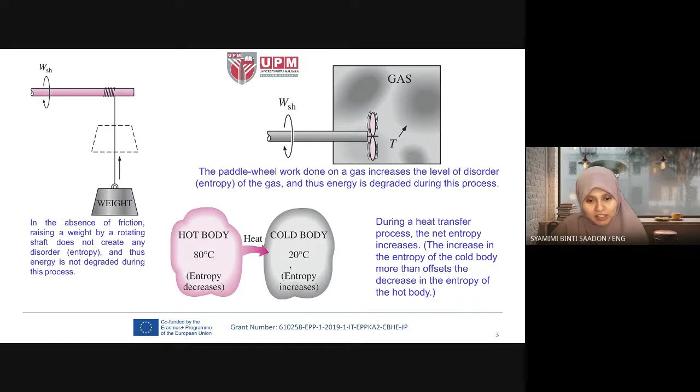During a heat transfer process, the net entropy increases. The increase in entropy of the cold body more than offsets the decrease in entropy of the hot body. During a heat transfer process from hot to cold material, there will be some entropy loss during the process. For example, even though the hot body is at 80 degrees Celsius and the cold body is at 20 degrees Celsius, not all of the thermal energy within the hot body will be transferred to the cold body. Not all of that 80 degrees will be totally transferred so the cold body becomes 100 degrees. There will be some energy loss during the heat transfer process, so only a portion of the energy from the hot body will be transferred to the cold body, not all of it.

This is a more interesting part. So how do we calculate, how do we measure this irreversibility, this entropy?

We have this TdS relation, where T is temperature and dS is the differential of S, entropy. We use it like enthalpy, the first law, using the per unit mass basis, so we write it in small letter, not capital letter. We can use capital letter S, meaning it is in kilojoule per Kelvin, but if you write small s, it means it is in kilojoule per kilogram per Kelvin.

So we use this TdS relation, and that's why we always draw the T-S diagram, temperature versus entropy S, because it results from this TdS relation. Of course, when we integrate this dS, we have S, so we get this equation.

For a closed system, the TdS relations are valid for both reversible and irreversible processes, and for both closed and open systems. This is a closed system example, a piston, and this is an example of an open system, a control volume. We have this control volume for example of a nozzle or turbine. The process system is open, but we still determine the control volume, CV. So this is an open system, for example a turbine process, where mass can flow in and out.

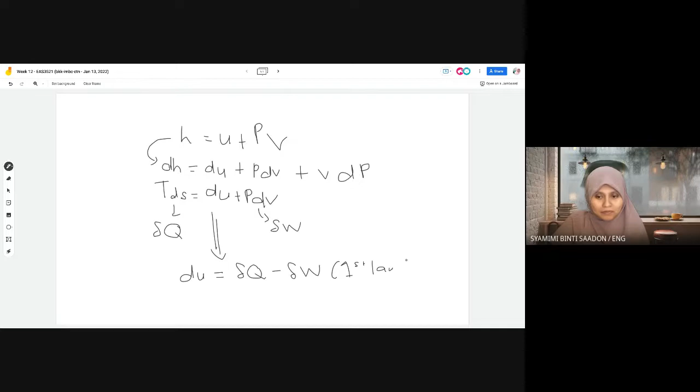This is also from the first law definition previously. So from this definition, we have this. So this is the first relation of TdS. Now we are going to create the second relation of TdS. So from both of these equations, we see that this part and this part are the same.

So we can write that TdS - these are the same - so TdS is dH minus VdP. This is the second relation of entropy TdS. So we have the first and second: first one, TdS equals dU plus PdV. Second one, TdS equals dH minus VdP.

So that's how, back to these slides, we get these two relations - these two relations of entropy that we're going to use. So from these two relations, if we rearrange and divide by T, temperature, we can also write it in this form.

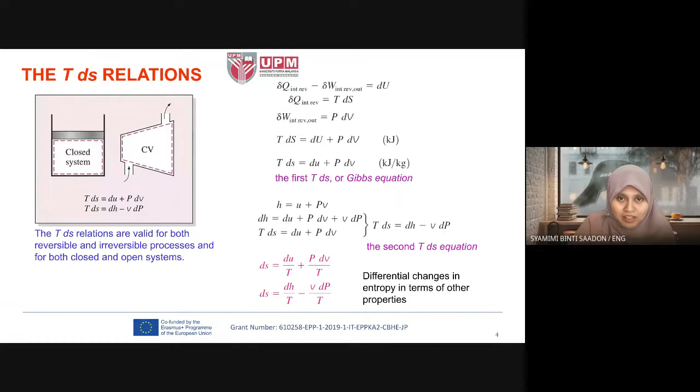This one is entropy change of liquids and solids. We want to apply this entropy relation for liquid and solid, and later on for gas. Maybe for us in aerospace, we use a lot more entropy for gas, but I'll explain liquid and solid first, since aero deals with air.

This one for liquid and solid can be approximated as an incompressible substance. So liquid and solid we assume approximate them as incompressible, meaning they cannot be compressed.

The opposite, gas, is compressible. That's why in aerodynamics 1, you only learn incompressible flow. But in aerodynamics 2, you see compressible flow, more high speed gas flow.

So entropy applies to liquid and solid. Since we assume liquid and solid are incompressible, meaning they cannot really be compressed, or it's hard and difficult to compress them.

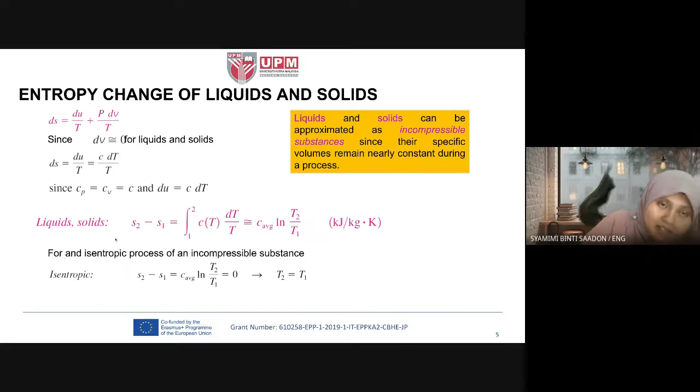So for an isentropic process of an incompressible substance, isentropic means no change in entropy, so S2 equals S1, meaning S2 minus S1 is zero.

For an isentropic process, like isothermal (constant temperature), isobaric (constant pressure), isochoric (constant volume) — isentropic means constant entropy, so S2 equals S1, and this relation becomes zero.

So what we can deduce from the isentropic process of an incompressible substance, liquid and solid, is that temperature also stays the same: T2 equals T1 for an isentropic process of an incompressible substance. This is what we derive from the relation, and it's important for you.

Entropy change of ideal gas. First we assume the ideal gas. From the TDS relation just now, we have ds equals du over T plus P dv over T.

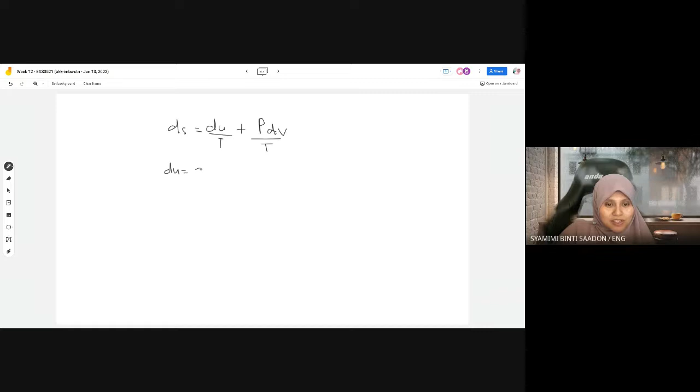I explain. We have the TDS relation: du over T plus PdV over T, the first relation. So we know that du is equals to Cv specific heat dt. This one we use specific heat at constant volume because we want to apply it for dv volume, because we have volume here. So du, we replace with Cv dt.

So that we can integrate this later on. This PT part, from the ideal gas relation, since this is ideal gas, PV equals to RT, ideal gas, chapter 2 or chapter 3, cannot remember, chapter 3. PV equals to RT, ideal gas. So here we have this PT relation with PT, P over T means R over V, from ideal gas.

So we replace this part, so we have V. Later on it's easy for us to integrate because we want to integrate the equation later on. So Cv, now we have relation in terms of T, so we can integrate this part and also this one R dV over V. If we leave it here like this, also correct, but it's just that we cannot integrate, we cannot develop it more. So in order to integrate and develop it, we change it into this form from the ideal gas equation.

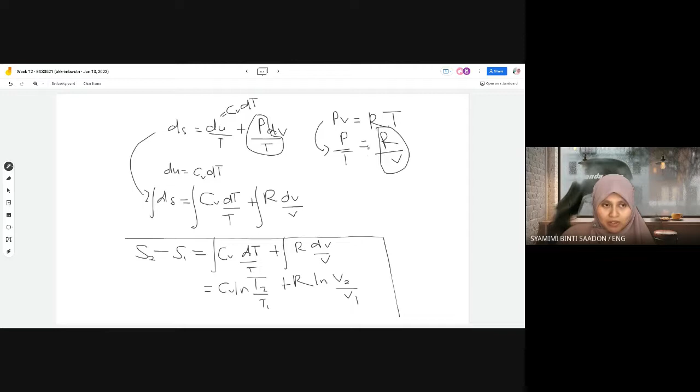So that's how we get this relation for ideal gas. Remember, ideal gas only, because we are using this part, so this is only valid for ideal gas.

So we have this part relation, and we can also use the second TDS relation, which relates enthalpy minus VdP just now. So this enthalpy we can write as CpdT, the definition of enthalpy, also CpdT. So from the ideal gas relation, we write V, ideal gas relation, this VT part can be replaced with R over P, from the ideal gas relation, R over P. So replace here R over P and replace here CpdT.

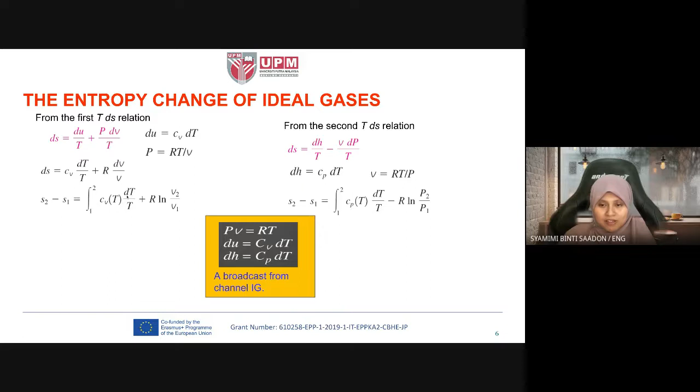So the same as this part, we write in integral form. So we have R ln P2 over P1, and this is R ln V2 over V1. So we can use both of these relations, depending on the parameter information that we have. If we have information on pressure, so we use this relation; if we have information on the volume, so we use this relation. So both are valid.

Okay, isentropic process of ideal gas, constant specific heat approximate analysis. We're not finished yet. We can continue developing this equation to get another equation.

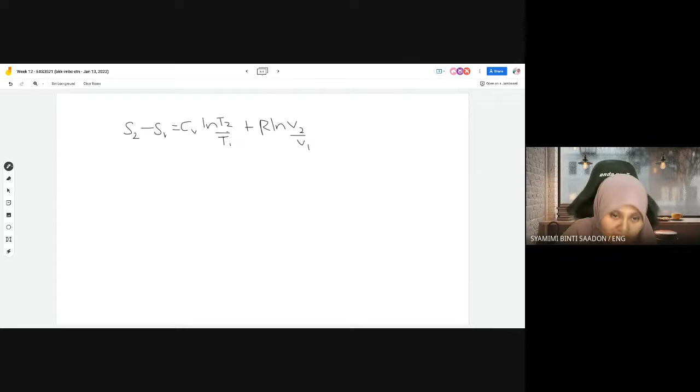Let me show it to you. So S2, from the first relation we have, S2 minus S1 equals CV ln(T2/T1) plus R ln of the first relation we got just now, which is this one, right? So if it's an isentropic process, this equals 0, S2 equals S1, since isentropic means entropy is constant. So we have CV ln(T2/T1) equals minus R ln(V2/V1). This is only for isentropic process.

And then we can rearrange this: ln(T2/T1) equals... we can write it this way... ln(V2/V1). So R over CV here is a power, right? Because we have ln, by logarithm theorem, we can change it into power form, the R/CV power. And we can also write it to eliminate the negative part, changing the ratio to V1/V2, so we eliminate the negative, with R over CV as the power.

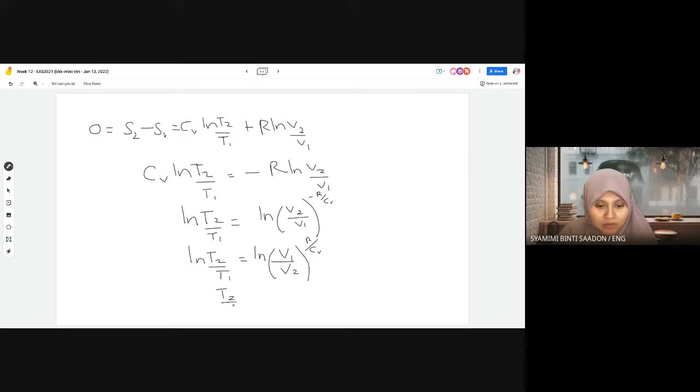So ln becomes T2/T1, and V1 over V2. R over CV is what we call — we have this relation.

There's a lot of relations, but you don't have to memorize them all. Just know that R can also be written as CP minus CV, the gas constant R, and CP over CV is the specific heat ratio gamma, so gamma equals CP over CV. If you replace this relation here, R over CV becomes gamma minus 1. We replace R over CV using this definition, so we get gamma minus 1.

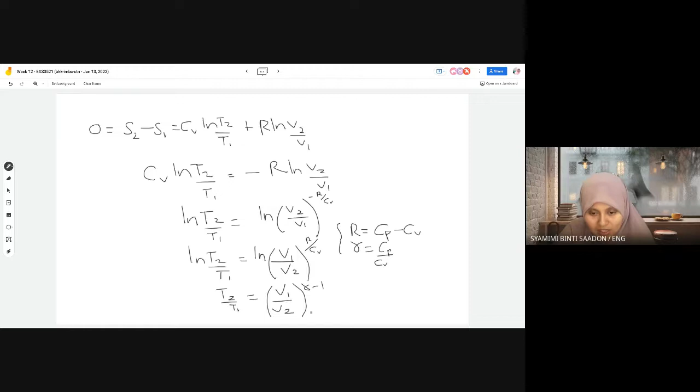Why can't we just state it as R/CV? Because gamma minus 1 is easier to calculate. Gamma is just a number — normally for air it's 1.4, or sometimes 1.2. So it's easier for us to calculate rather than using R/CV directly. So we get this relation: T2/T1 equals (V1/V2) to the power of gamma minus 1. That's how we get from here to here.

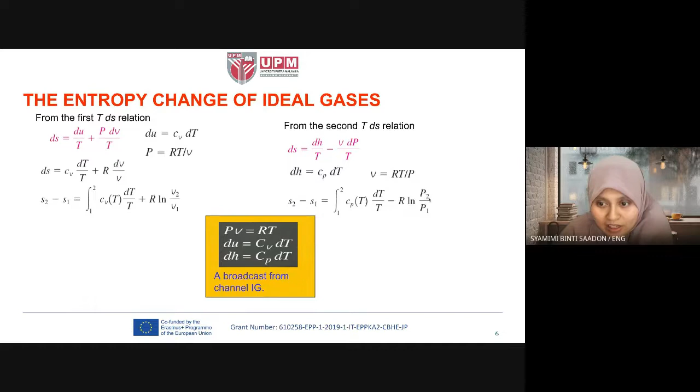Even though you've seen the steps, this is just to explain how we derive this part. So we have this one, same as before, using the second TDS relation, which contains pressure P. Using the same method, we get this second relation. This is very important — these three relations are very important. For ideal gas, using the ideal gas relation, we replace T with volume too. So these three relations are very, very important. We are going to use them several times until propulsion courses.

This is valid only for isentropic process, ideal gas. Please remember this — only isentropic process, ideal gas. Why? Because we assumed this term is zero; otherwise we couldn't derive until this step. So only for isentropic process can we use this relation, because we assumed this part is zero. And it's for ideal gas because we used the relation PV=RT to develop the equation, so it's only valid for ideal gas. So again, remember these three forms, very important — you're going to use them several times until propulsion courses and in your future. It's only valid for ideal gas, isentropic process, and constant specific heat — we assume it's constant, doesn't depend on temperature, etc.

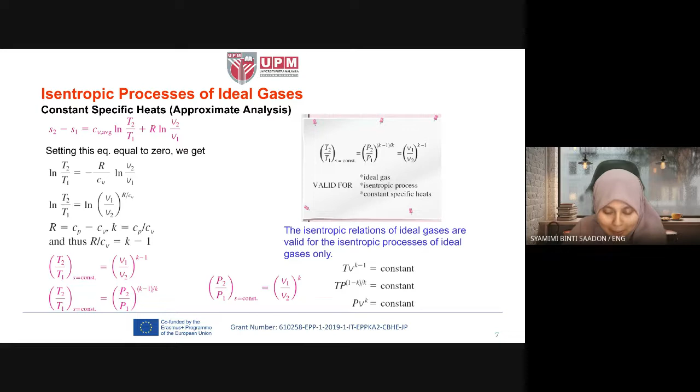This goes back to the first law of thermodynamics. Now we mix the first law and second law. Remember the first law: delta Q minus delta W equals dH plus kinetic energy and potential energy. The Q term is TdS, which we already derived just now. So we can rearrange this first law equation as TdS equals dH minus VdP — this is the second TdS relation.

Okay, so from both of these, we have delta Q equals dH minus VdP. This part is the same, so delta Q equals dH minus VdP. And if we replace this part here, dH and delta Q, so we have minus VdP here. That's how we get it, let me show you.

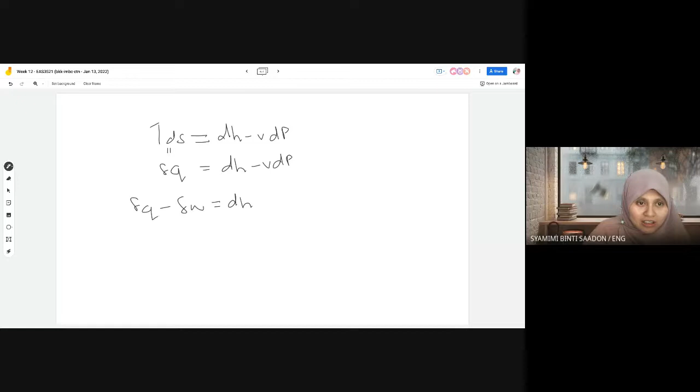And then from the first law relation, we have delta Q minus delta W equals dH plus the change in kinetic energy and the change in potential energy, right? So this dH, delta Q minus dH is minus VdP.

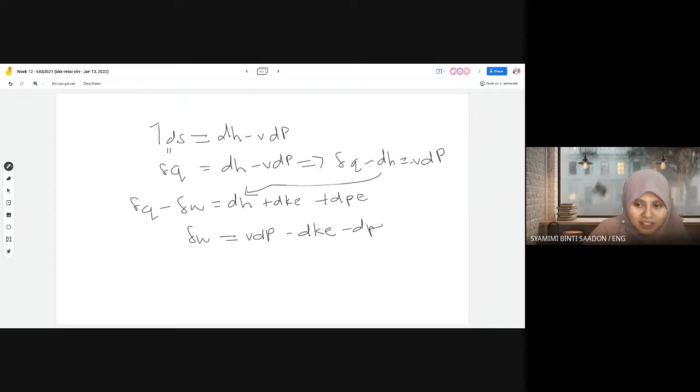So from here we can put in VdP. So that's why we get delta W equals VdP minus the change in kinetic energy minus the change in potential energy. We change the negative to positive. So that's how we get this one.

Okay, for reversible steady flow work, this applies in steady flow systems, for example compressor, turbine, nozzle. So we have this reversible steady flow relation. If we integrate it, we assume there is no kinetic energy and no potential energy, or very small potential energy, so when kinetic and potential energies are negligible, we have only this reversible work, VdP.

Otherwise the full equation is like this for reversible steady flow work, to calculate reversible steady flow work. For the steady flow of a liquid through a device that involves no work interaction, such as a pipe section, the work term is zero. If it's for liquid steady flow through a liquid device, for example a pipe.

For a pipe there is no work done. A pipe has only the flow, fluid flow, so no work, no work interaction. So this part is zero, no work.

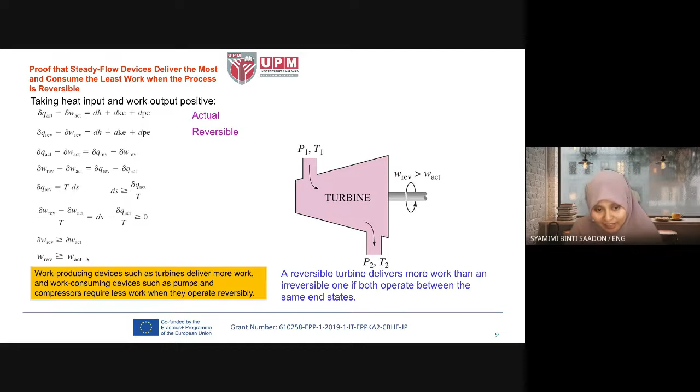Example of application: turbine. You can see this application of reversible work in a turbine. Rearrange the equation, etc. So you have this proof that a steady flow device delivers the most and consumes the least work when the process is reversible — of course, reversible is an ideal process. So if you have a reversible process, it will deliver most work, meaning more power output, and consume the least work. This is just to show from the equation that the reversible process work is higher than the actual work produced in reality, for example, for a turbine.

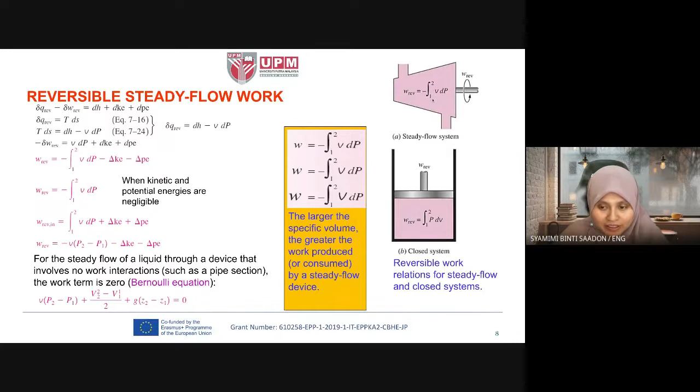This example is a general equation which can be applied for turbine. Okay, for compressor it's the same, it's just that here we don't have the negative value anymore because the compressor's function is opposite of the turbine.

So for example, for turbine the pressure at the exit is less than the pressure at the inlet, because in the turbine we expand and decrease the pressure. In the compressor it's the opposite, we compress, so we increase pressure. That's why the change is negative versus positive.

Okay, just that about the increasing or decreasing pressure value. So if the potential and kinetic energy are negligible, we have this form of reversible work for compressor.

For this we have isentropic, polytropic, and isothermal. I think we only focus on isentropic, which is more frequently used, and isothermal. Polytropic we seldom use, so you can just forget it.

Okay, isentropic. For the isentropic process we have this PV^k relation, k or gamma, the specific heat ratio. So the reversible work can be written in this form: gamma RT over gamma minus 1, times P2 over P1.

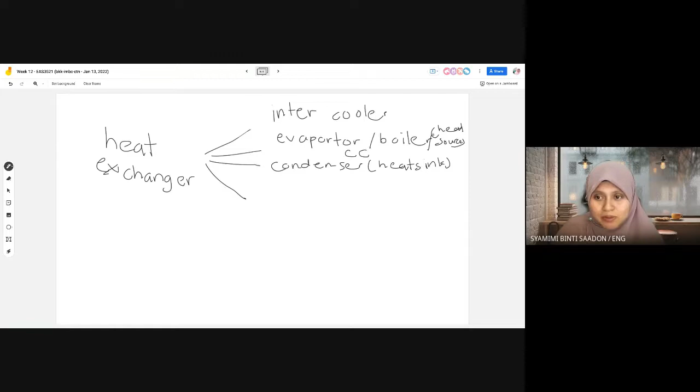Include here also, evaporator boiler is the combustion chamber. Combustion chamber has the same function as evaporator boiler. We also have reheat, to increase temperature - this one is to cool down, this one is to increase temperature.

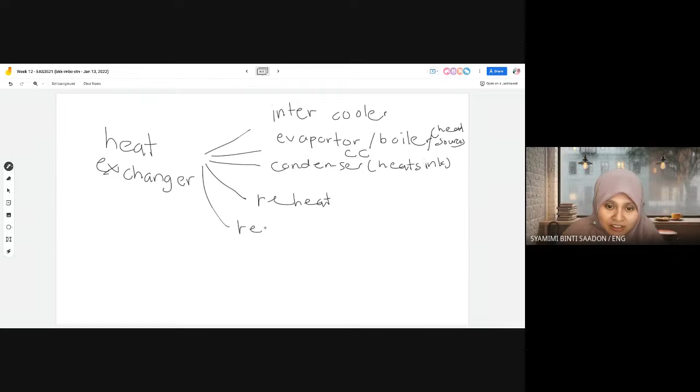What else? We will also have regenerator, to exchange heat from the hot side to the cold side. As I've explained to Marwan last week, regenerator.

So all of these are types of heat exchanger. Just want you to understand this concept. All of them are heat exchanger, just different in the function objective.

Intercooler is to lower down the temperature. This is to evaporate, to boil, to increase heat input. Condenser exchanges heat with the heat sink, reheat to increase temperature, regenerator to regenerate the heat from the hot side to the cold side.

So all of them need exchange of heat in the device, exchange of heat in the device. That's why they are what we call heat exchanger.

So intercooler is normally added at the compressor, between or before the compressor, to save the work used in the compressor. Because if we can save the work input needed in the compressor, we minimize the work, so we can increase the efficiency, meaning we use less electricity, etc.

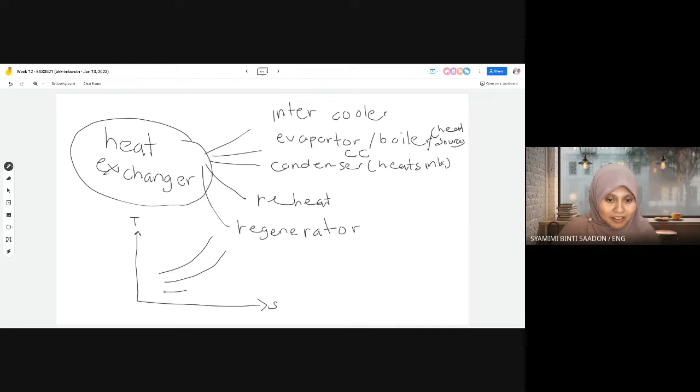Okay, like this. If we don't have intercooler, this is point 1. This is P2, the isobar line, this is P1. We need the compressor to compress, to increase the pressure of the working fluid.

If we don't have intercooler, so the fluid should follow a straight line. The fluid will be increased from state 1 to state 2 at this point, directly, without intercooler. This will be the total work input in the compressor that we need to give - we need to use work to give work input. So without intercooler, directly, temperature T2 here, this is T2 and this is T1.

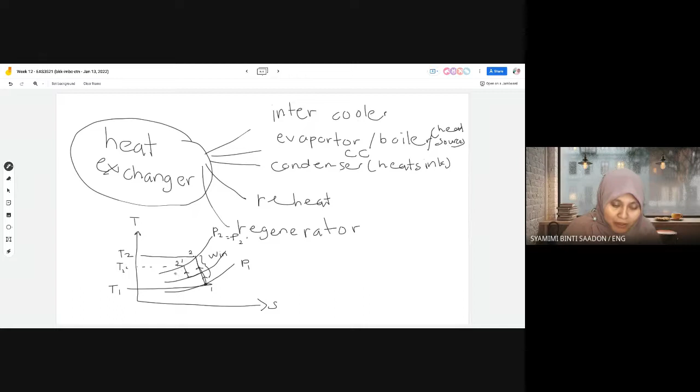If we add an intercooler, we intercool first, lower the temperature, then compress again the fluid, say at point 2 prime. The pressure is still the same, P2 equals P2 prime, and we still reach the final pressure, but the temperature will be different, lower. Since work depends on the change in temperature, T2 is less, so the work input is lower. That's why we save work by adding the intercooler.

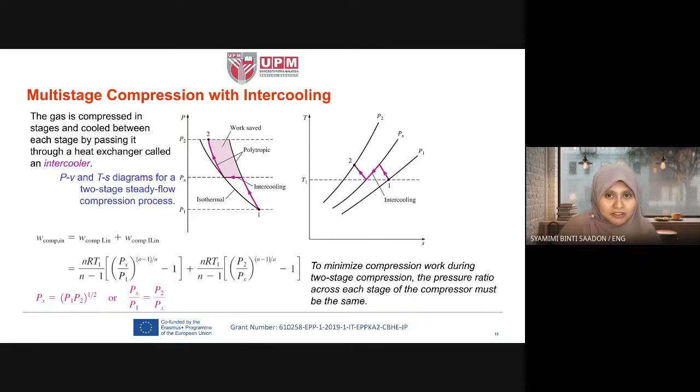That is the function of the intercooler, to intercool at constant pressure. Normally all processes in heat exchangers - intercooler, evaporator, reheater, regenerator - the ideal process is at constant pressure. So we assume constant pressure, and then compress back, using less work by adding an intercooler between the compressor stages. That is the function of the intercooler, like in your car or engine.

Now turbine, isentropic efficiency of turbine and compressor. Compressor work, minimizing compressor work. Isentropic efficiency of steady flow device, from the isentropic process. There's no irreversibility, and it serves as the ideal process for an adiabatic device.

The ideal process we assume as isentropic. Isentropy is an ideal process, meaning no irreversibility, no energy loss, so the ideal process is reversible, while the actual process is irreversible. To quantify this, we define turbine efficiency as the ratio of actual turbine work over isentropic turbine work, actual over ideal. Of course, efficiency has to be less than 1, less than 100%.

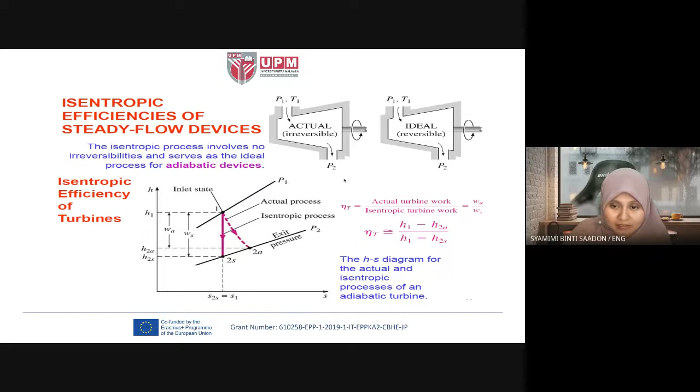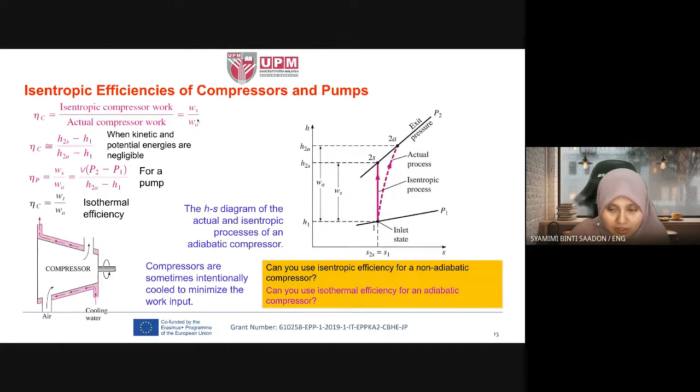So we have these three equations for isentropic efficiency of steady flow devices, meaning you have inlet and outlet flowing in the device: this is turbine, this is compressor efficiency, and this is nozzle efficiency. Remember, for nozzle you use velocity; for compressor and turbine you use the calculation of work, because we use work to run the turbine and compressor.

Back to our entropy stuff. Entropy balance. Before this, for the first law we have energy balance, so for the second law we have entropy balance. How do we write this entropy balance? The definition is the total entropy entering minus the total entropy leaving, inlet minus exit, plus the different part: total entropy generated, the irreversibility generated, equals the change in the total entropy of the system. So it's not just S in minus S out, but we have this entropy generated in the closed system.

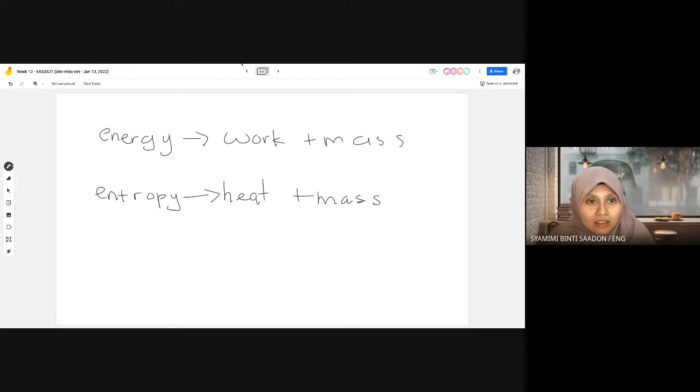Remember this one. Let's check: energy transfer by work, heat, work, and mass. So you have the energy, the entropy transfer by mass.

So the entropy generation, the same equation just now, net entropy transfer by heat and mass. So this is S in and S out, net entropy transfer by heat and mass. This one, entropy generation, generated, so the total is the change in entropy. You can also write it in terms of rate of energy, net entropy, rate of change in entropy, either in kilojoule per kelvin or in kilowatt per kelvin.

Closed system: so we have the entropy change for a closed system. The change in entropy, or the entropy change of a closed system during a process, is equal to the sum of the net entropy transfer through the system boundary by heat transfer and the entropy generated within the system boundary. So for a closed system, the change is only between S2, the final point, minus S1, the initial point. That is for a closed system.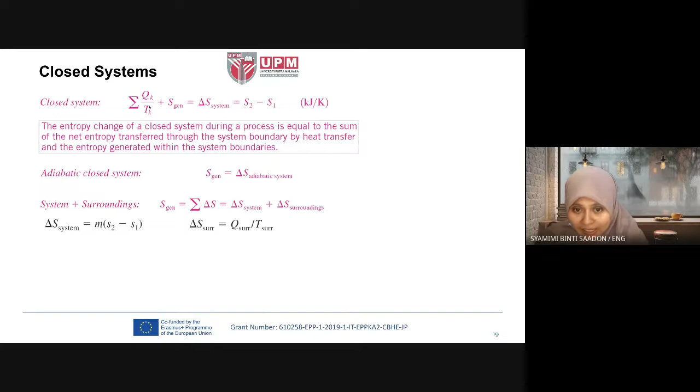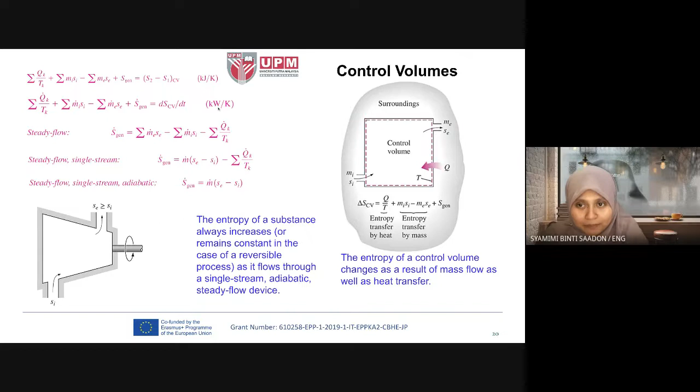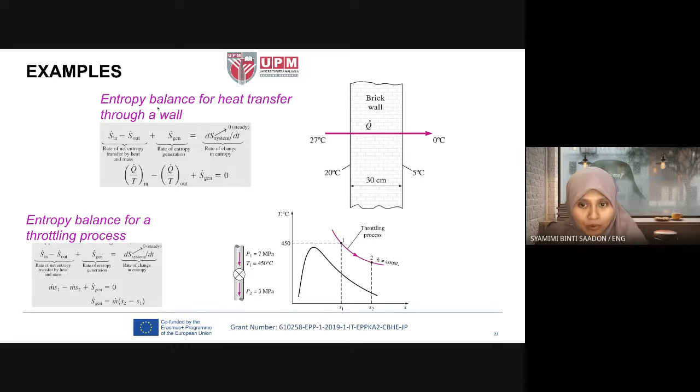Okay, example lagi tak apa. Okay, finish, Alhamdulillah at last. Okay, 11 nearly 11:30, 11:21. So we have time to do maybe I have 4 example questions, but maybe you can do 1 or 2. We have time to do 1 or 2 exercise examples. Okay, maybe 1 minute.

Okay, we need to calculate electricity a bit. Try to read the question first, example. Later on we do the exercise.

A cryogenic manufacturing facility handles liquid methane at 115 Kelvin. Later on I have this table for you. Liquid methane at 115 Kelvin and 5 megapascal, at a rate of 0.28 meter cube per second. The mass flow rate, this time, is a volume flow rate of the liquid methane.

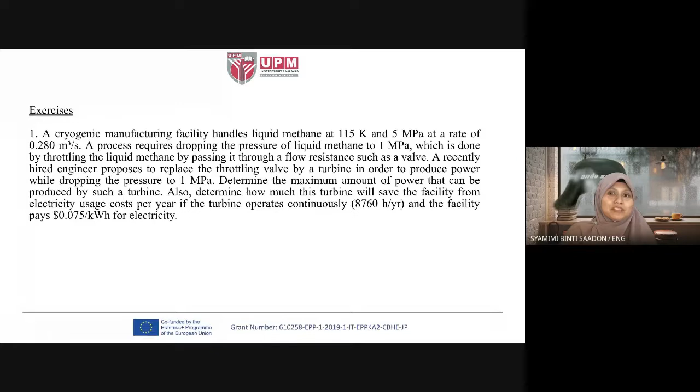Before that, what is cryogenic? Maybe some of you have heard this process, but maybe this is a new word for you. Cryogenic is actually a production process of materials at very, very low temperature. If you look at it, 115 Kelvin equals to how much degree Celsius? Negative 158, around negative 160 degrees Celsius. So very, very low temperature. Cryogenic manufacturing is a process to manufacture materials at very low temperature, that's why here we use methane.

So at 115 Kelvin and 5 megapascal, at a volume rate of 0.28 meter cube per second, a process requires dropping the pressure of liquid methane to 1 megapascal. In order to conduct the cryogenic manufacturing, we need to decrease the pressure of the methane from 5 megapascal to 1 megapascal. So this process requires expansion, decreasing the pressure of the liquid to 1 megapascal.

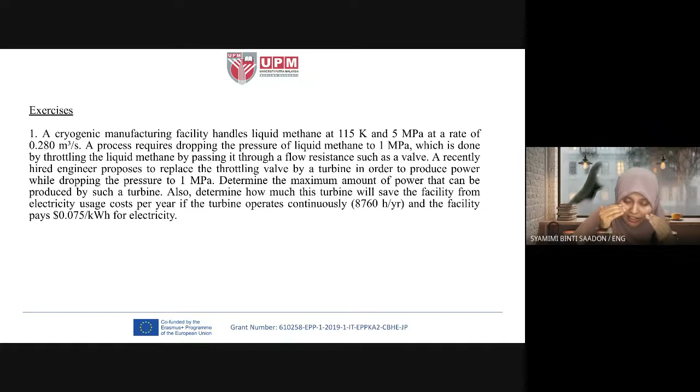Determine the maximum amount of power that can be produced by such a turbine, how much power this turbine can produce while decreasing the pressure. Also determine how much this turbine will save the facility in electricity usage cost per year if the turbine operates continuously 8,760 hours per year and the facility pays 0.075 dollars per kilowatt hour for electricity. So you need to calculate a bit of electricity. But first part, maximum amount of power that can be produced by such a turbine.

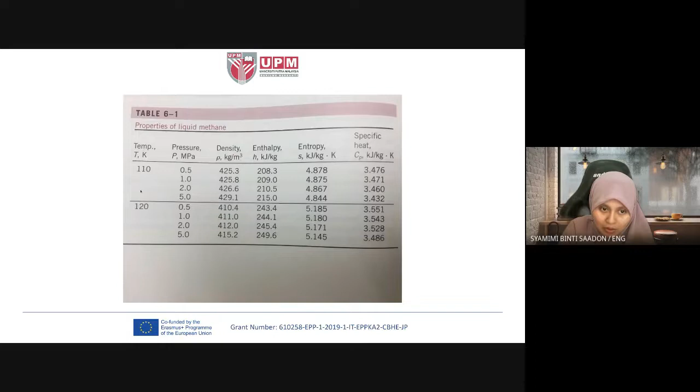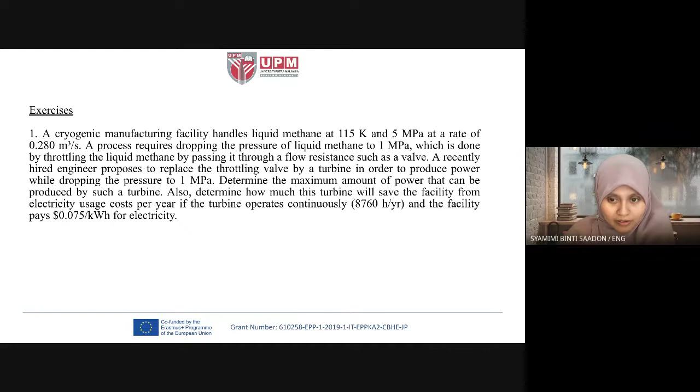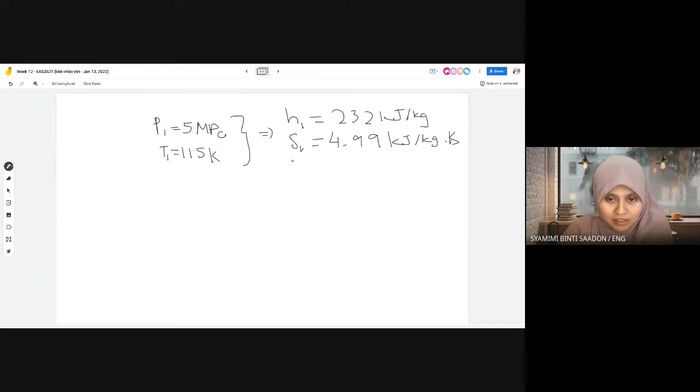Okay, just now state 1. State 1, you have P1, 5 megapascal, you have this information given, and you have T1, 115 Kelvin. So from this information, you look at the properties table of liquid methane. So you have H1, 232 kilojoule per kilogram from the table, and you get S1 around 4.99 or 5 kilojoule.

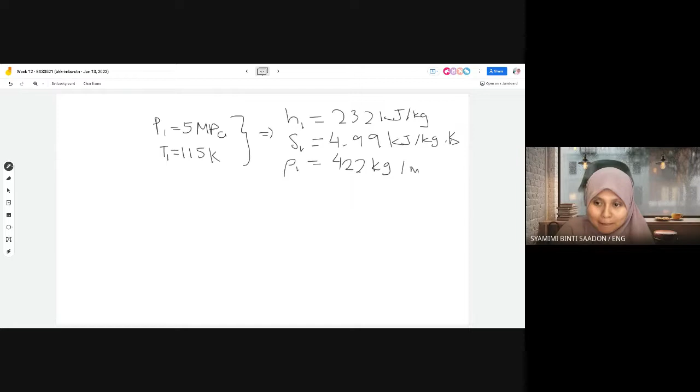Don't forget the unit, kilojoule per kilogram per Kelvin, and density in case you need it, around 422 kilogram per meter cube. And then at state 2, the final state, we need to decrease the pressure to 1 megapascal. When we assume this is a steady flow process, isentropic, etc. We are in this chapter, so we assume S2 equals S1, isentropic process.

What do we want just now? Determine the maximum amount of power that can be produced by such a turbine. We want to calculate the power, maximum amount of power. Now we have the enthalpy, kilojoule per kilogram, so to change it into power, we need to find the mass flow rate.

Mass flow rate: we have density from the table, and we have the volumetric rate just now, 0.28 given, times the density. So we multiply it, we get 118.2 kilogram per second. So that is our mass flow rate of the methane.

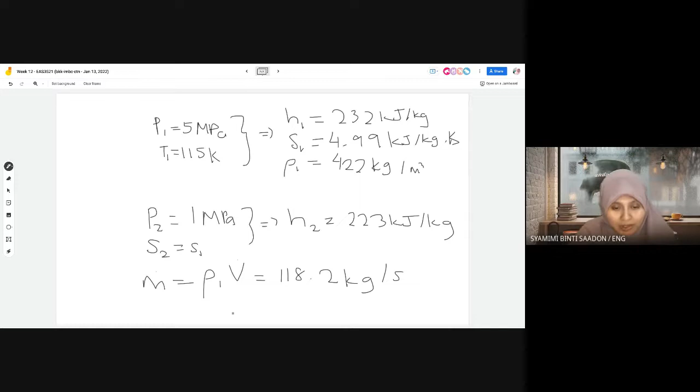So in order to calculate the maximum power that can be produced by such a turbine, from the energy balance, we have E in equals E out, energy balance. So we don't have Q, heat transfer, during the process. For turbine, we don't have heat transfer, we only have work. So the work output, from the first law energy balance, only considers the enthalpy.

H1 minus H2, because we want to have a positive point, H1 is higher, more energy. So that's how we get the power, the maximum amount of power produced by the turbine. So this mass flow rate, H1, H2, mass flow rate, you get the output power of a turbine around 1123 kilowatt. We use kilowatt because we have the mass flow rate in seconds.

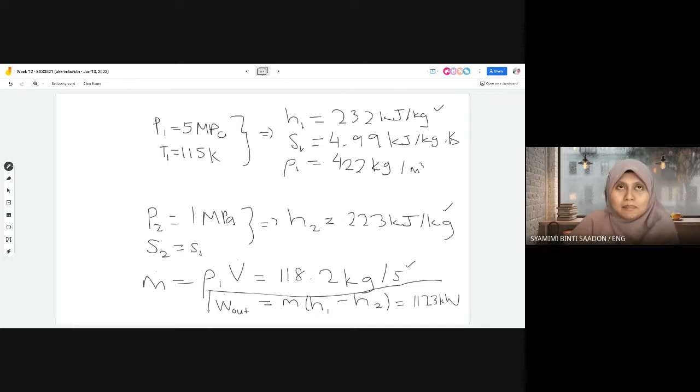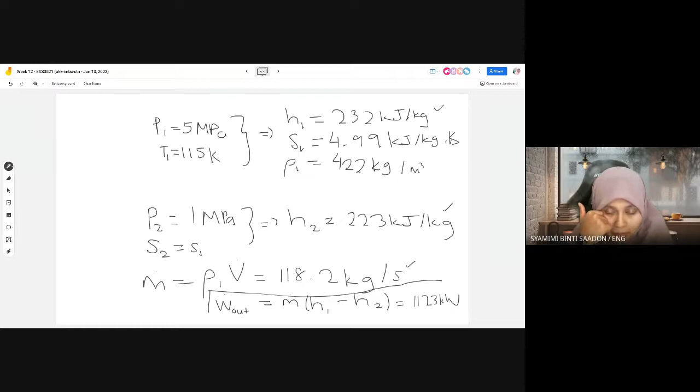So this is from the energy balance, first law, because for turbine, no heat transfer within the turbine, only work output. And then no kinetic energy, we neglect the kinetic energy, and we neglect the potential energy. So only enthalpy, the change in energy transfer by mass, only the enthalpy part. And the work, of course, work output, no heat, no kinetic energy, no potential energy.

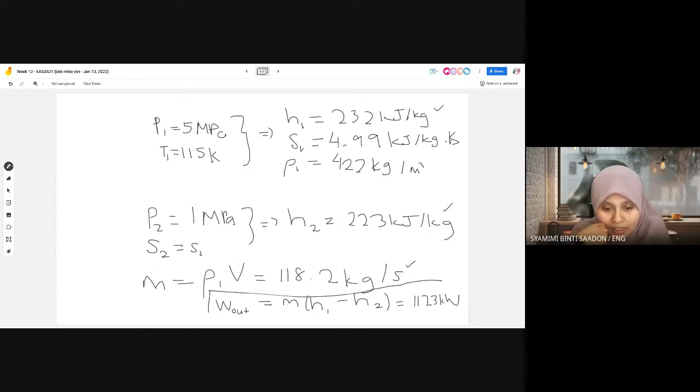So we have this equation, this energy balance, first law: work net output is the energy transfer by mass, which is enthalpy. So you can calculate directly the amount of power output: 1,123 kilowatt.

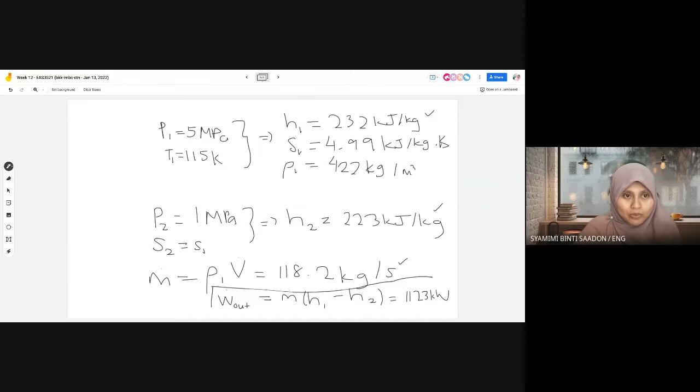And then what do we need? Also determine how much this turbine will save the facility from electricity usage cost per year, if the turbine operates continuously 8,760 hours per year. So the power plant is operated during a year annually at 8,760 hours. So the total annual power production, just now we have W output, net output.

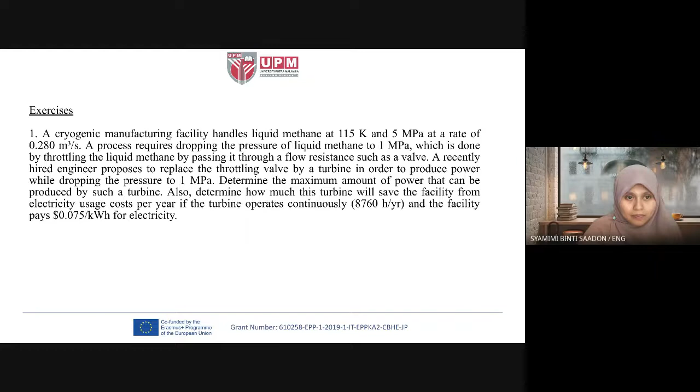W net output, 1123 kilowatt, or kilojoule per second. So we need to change the seconds into a year.

Okay, we can change a kilowatt. So annual power production is the W out times the hour, 8760 hours per year. So we have this value in terms of kilowatt hour per year. This is in kilowatt and this is in hour per year, so you have the answer in kilowatt hour per year. That is annual power.

How much does one save the facility from electricity usage cost per year if the turbine operates continuously, and the facility pays per kilowatt. So how much do we pay? Annual power saving, annual saving by using the turbine.

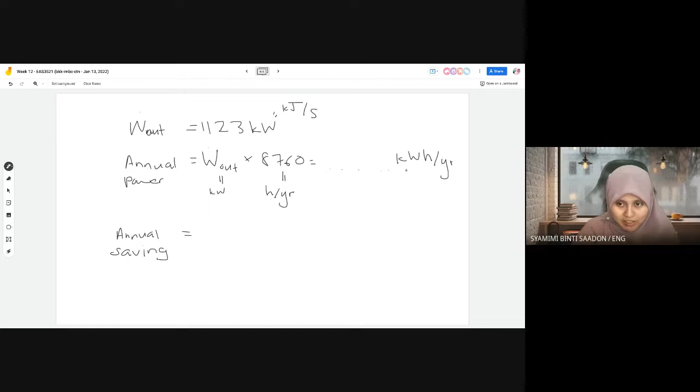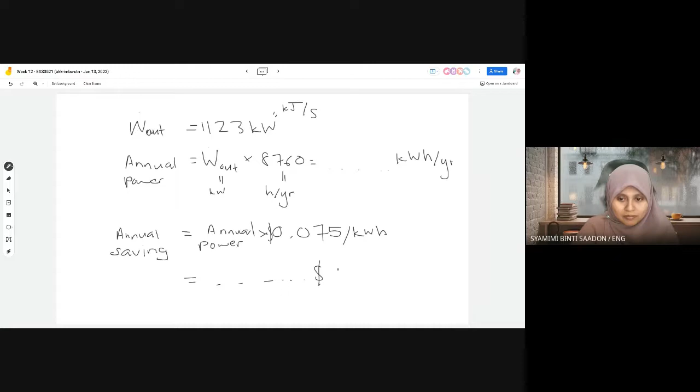So the power production here, the annual power production, multiply with the unit cost power, 0.075 per kilowatt hour. This is dollar per kilowatt hour, and this is kilowatt hour per year, so you have the answer in dollar per year. How much you pay per year, how much you save actually per year by using the turbine instead of the throttling device.

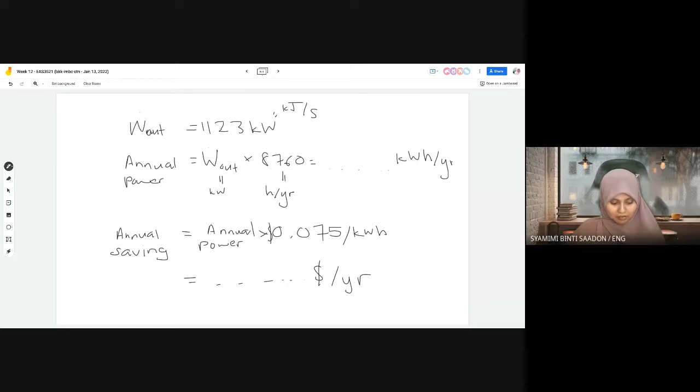So you calculate around 700,000, the annual saving. You can save per year around $700,000 by replacing the turbine, because you can produce electricity from the turbine, not only decrease the pressure. So that is the answer. You calculate by yourself.

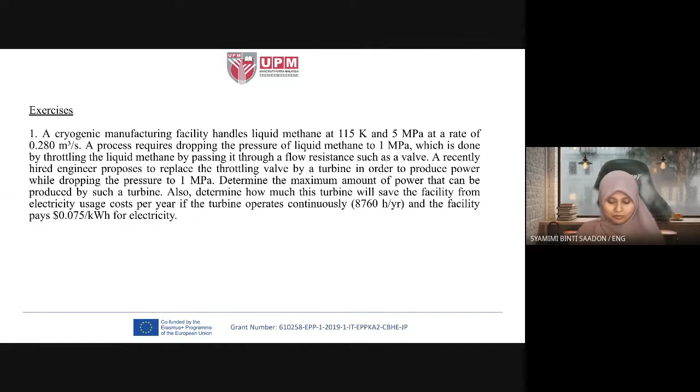Determine how much this turbine will save the facility from electricity usage cost per year if the turbine operates continuously hours per year and the facility pays for electricity. Okay, one minute for you to digest. Any questions?

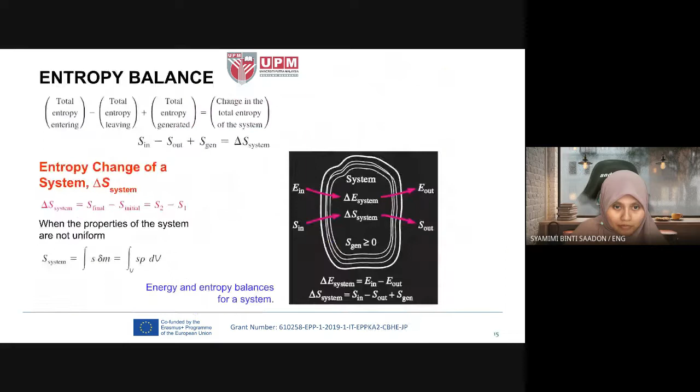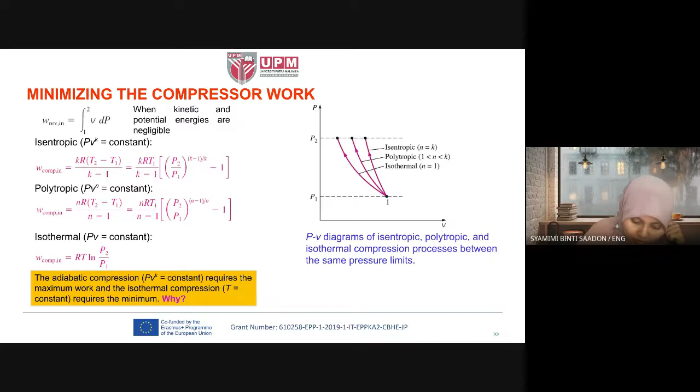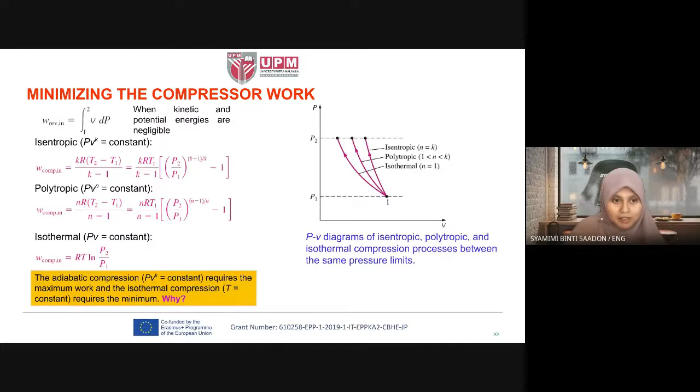So for liquid, reversible work for compressor, okay, we can use this one: the integral of V dP. Okay, we want to calculate the reversible work, integral from 1 to 2 of V dP.

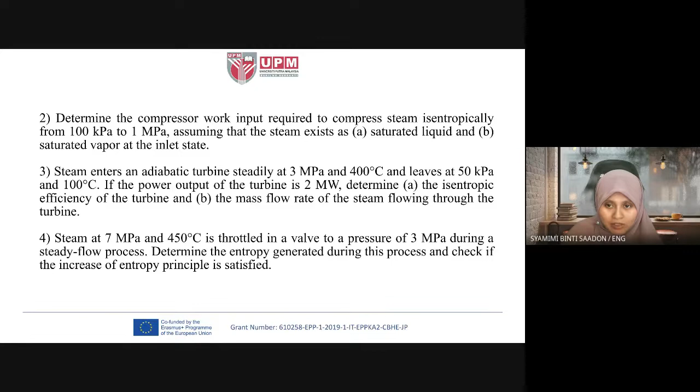So here we need to find the value of V. We can assume that V here is constant, so we can take it out from the integral. So we get V times (P2 minus P1). P2 and P1 we have the information, we just have to search for the information for V. Why can we assume it as constant?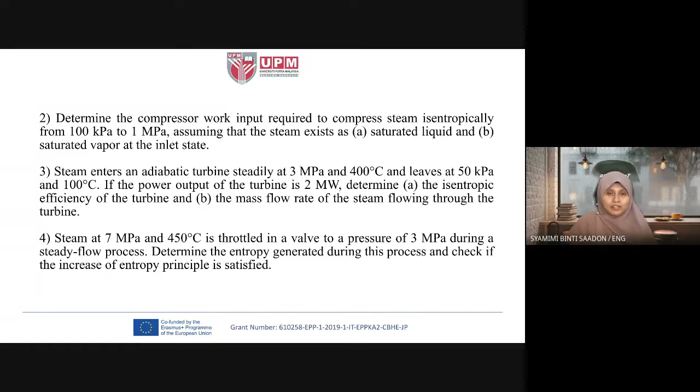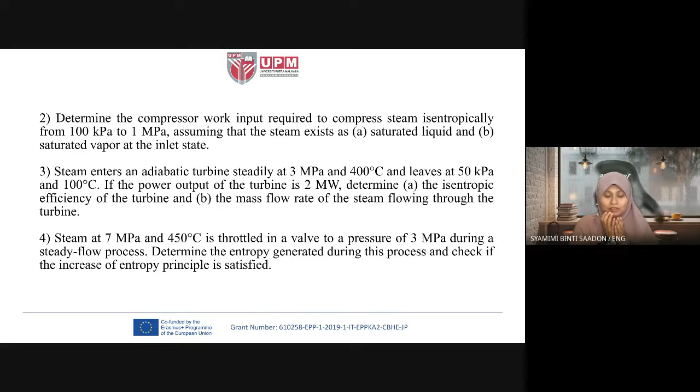Actually, like just now, for liquid, the change in the volume during the compression process is very, very small. You can neglect it, but here we don't totally neglect it. Since we assume that the change is very small, the volume maintains at the same volume, sorry, let me point this out. So we can assume that the volume of the liquid stays constant, because during the compression, the change in the volume of the liquid is very, very small. That means the initial volume is the same as the final volume.

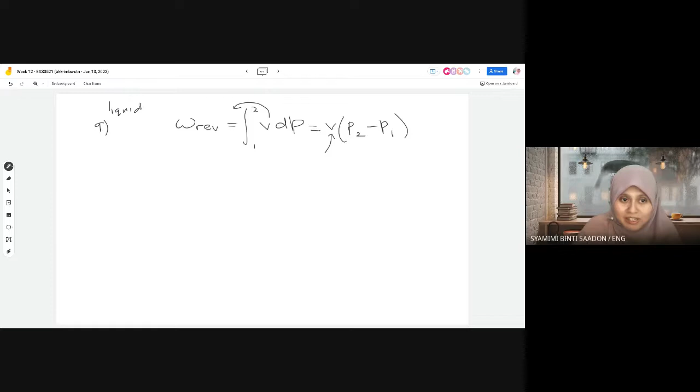So we only search for one value of volume, and we can integrate this way: take out the volume and integrate only the pressure part. Because liquid is an incompressible substance, remember, liquid and solid are incompressible. So the change in volume is very, very small, that's why we can say V1 equals V2. So we only need V liquid, which is VF in the table.

So look at table A5 that we have from the previous chapter. We use table A5 at 100 kilopascal, we take the initial value of pressure 100 kilopascal, because at that point the substance is in liquid form that we want to consider as constant. So from table A5, we look at that table we had before, and we take VF, and here it is very small: 0.001043 meter cube per kilogram.

Okay, and then we replace this value inside here. This one is 1 megapascal, just now, 1 megapascal. 1 megapascal means 1000 kilopascal. And this one is 100 kilopascal.

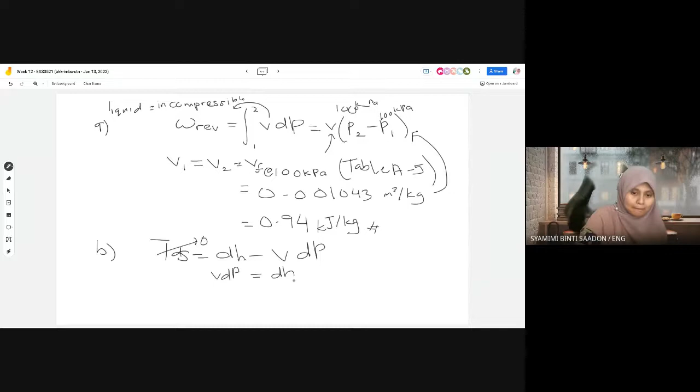So back to the relation, the same relation of compressor work, VdP. So we can calculate it by using dH, which, if we integrate it, is H2 minus H1. So easy, for saturated vapor we have this relation. Just find H2 and H1 using table A5, A6, etc. So P1 at state 1.

P1 is 100 kilopascal just now. So for saturated vapor, look at table A5, saturated vapor. So you have H1 and S1, but you're only going to use H1. So H1 is 2675 from the table. And for state 2, P2 is at 1 megapascal. So H2 from the table is 3195 kilojoule per kilogram.

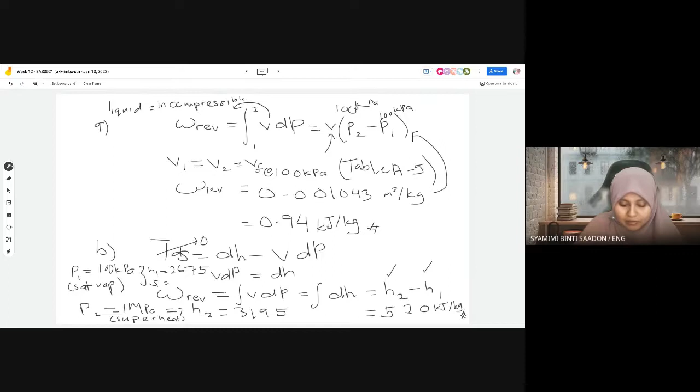So you see the compressor work for liquid is very, very small, only 0.94. But for gas we need to put extra work, which is 520 kilojoule per kilogram. So compressing a steam in the vapor phase form would require around 500 times more work than compressing a liquid, between the same pressure limit P2 to P1. Liquid you only need around 1 kilojoule per kilogram; this one you need around 500 kilojoule per kilogram for gas, vapor.

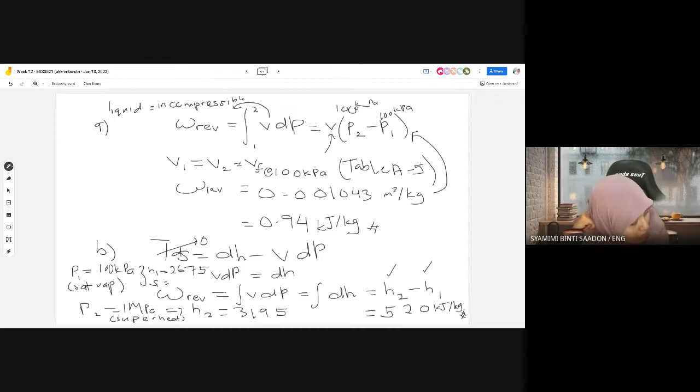Any questions? Understand? You use this, we use the old table that we already have, table A5 and table A6. Table A5 the vapor, and then the superheated water steam table. Okay, by looking at the pressure.

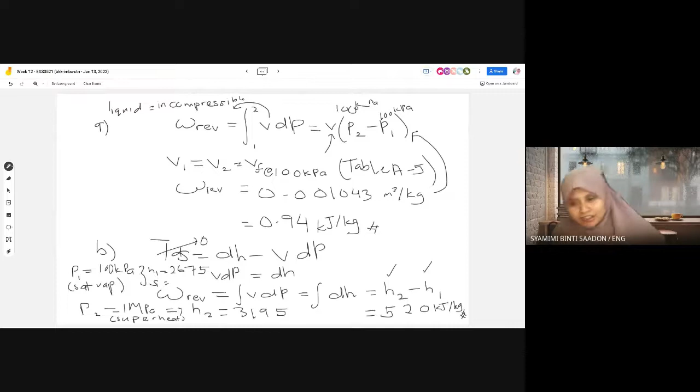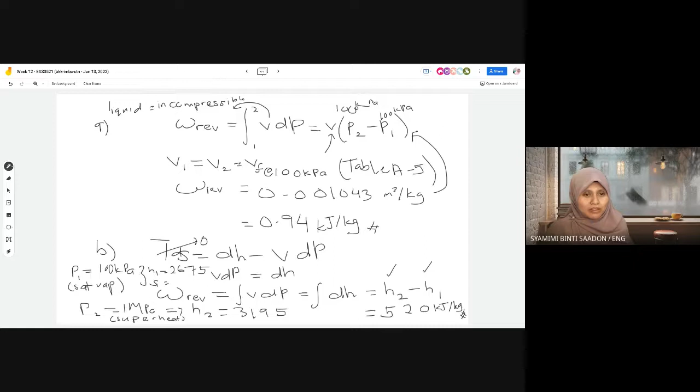Okay, we finish here. Example 3 and 4 you can try, otherwise if we have time next week, we have 2 weeks more. Next week I will start another chapter, the final chapter concerning gas power cycle, the most important part for your aircraft engine, gas power cycle. And if we have time, inshallah, maybe the last final week 14, to do some revision. So I'll try to compile all the exercise examples, so we try to do more, look at more examples before your final exam. So only left with one chapter, gas power cycle, but it's the most important.

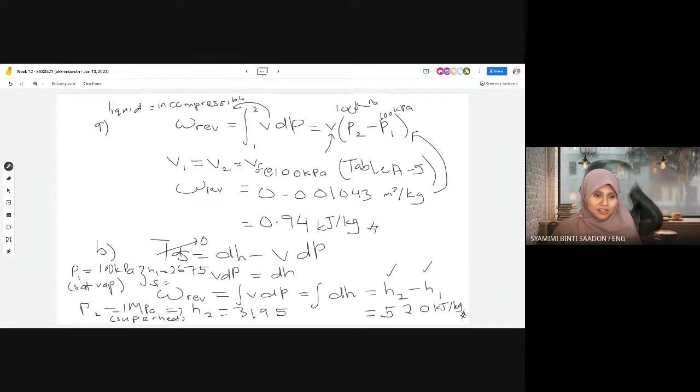And only 8 of you today, 5 didn't come, 5 absent. Only 3 of them told me that they cannot come, so I don't know about the other 2. I'll wait for them to.